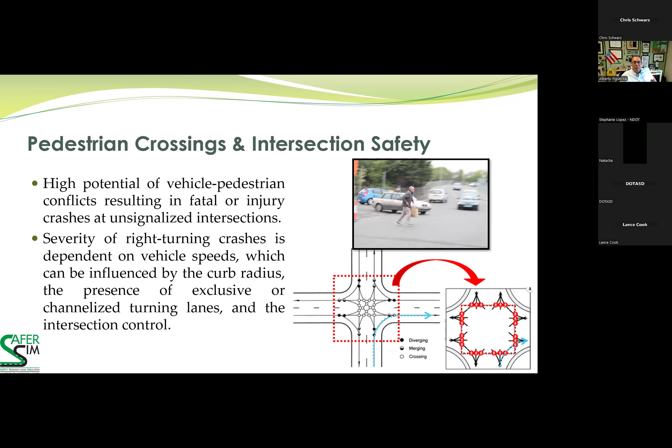Obviously, the severity of those right-turning crashes has been linked to the speed of the turning vehicle. And the speed is also influenced by the curb radius at the intersection, the presence of turning lanes, if any, and also the traffic control. One of the safety issues with a right-turning vehicle is the focus of the driver. They might be focusing on their left side, looking for conflicting traffic coming into the intersection, and might be overlooking pedestrians on their right side. And they realize that once they are already at speed trying to complete their turn. So that's one of the issues we wanted to look at with virtual reality.

We have used virtual reality as a pedestrian simulator in previous studies. We completed 2 studies in the Safer Sim group. And other colleagues at the Safer Sim Consortium have worked with virtual reality and shown the benefits of using it to study pedestrian behavior in a safe and controlled environment. Obviously, the real life is outside on the street, but you have many confounding factors, and collecting data in real conditions is not cheap, and sometimes it's very complex, depending on the amount of technology you have available.

So the benefit of virtual reality is having that interactive simulation. There are opportunities for interaction between the user and the scene, and the sensory immersion allows the technology to recreate in some way real world experiences. Like I said, researchers at the University of Iowa and other members of the Safer Sim team, for example, Dr. Kearney, Dr. Plumert, have used virtual reality, and they have shown the application of virtual reality technology for studying the human brain and the reactions.

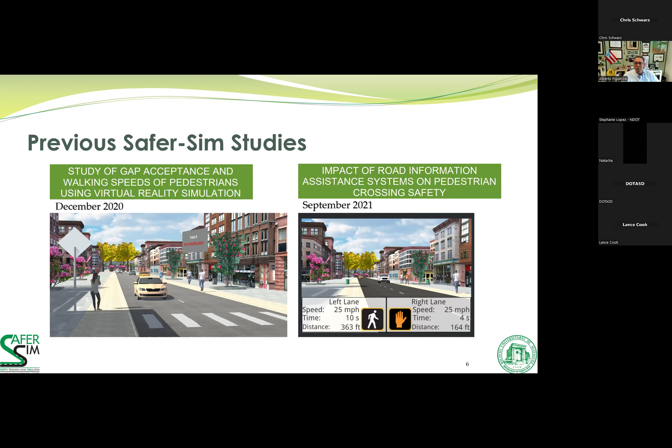So very, very interesting. And those two webinars, we already completed those. The reports are on the Safer-Sim website. So I invite you to take a look at them if this topic is of interest to you.

In this study, the objective was to simulate right turning situations. So we now move from the straight segment to an intersection. And we use unsignalized intersection for this topic. We wanted to see the behavior of the road user at those type of movement, right turning movement at the intersection. I can say we, at the beginning, were very aggressive in the proposal, probably looking hindsight. These are really two projects into one. We wanted to see the two perspectives on the situation, first the drivers and then the pedestrians. So the concept was to analyze right turning behavior from the two perspectives, drivers and pedestrians.

In the case of the driving simulation using virtual reality, this was our first attempt. So obviously, I want to acknowledge that we had a lot of growing pains to create the virtual reality for the driving simulation. We didn't have that experience before, so we started basically from scratch, trying to recreate the cockpit driving simulator that we already have with the screens and everything, and we wanted to recreate that on the virtual reality technology. And it took us a lot of time, more than we expected at the beginning.

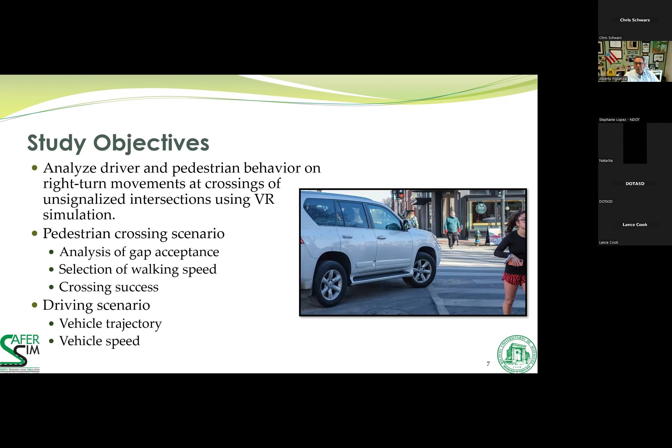And we required assistance. I have to thank Dr. Kelvin Santiago from University of Wisconsin, who gave us a lot of help, technical assistance, how to adapt our current driving simulator to the virtual reality environment. So that was a lot of help, but like I said, it took us more time than we expected at the beginning. So we had to make some changes to the methodology we proposed at the beginning. The methodology included 12 steps. 8 of those, we had to repeat them for the driver scenarios and then for the pedestrian scenarios.

At the beginning of the process, we wanted to have a sequential process, and we wanted to have the driving simulation first, so we can measure behavior of drivers at the right turning movement, and then take that information to program the avatar vehicles on the pedestrian simulator. Like I said, the time it took us to complete the driving simulator was too much, and because we had already experience with the pedestrian simulator, we had the pedestrian simulator rather quickly after we created the city. So instead of having a sequential process, we decided to split them apart and have them as parallel paths with the pedestrian and then with the driver. So that was the sequence we followed.

We had to create a city, a virtual city for the projects to be able to run the test trials, and then we created the scenario. So let me tell you that the city was based on a 6x6 block structure.

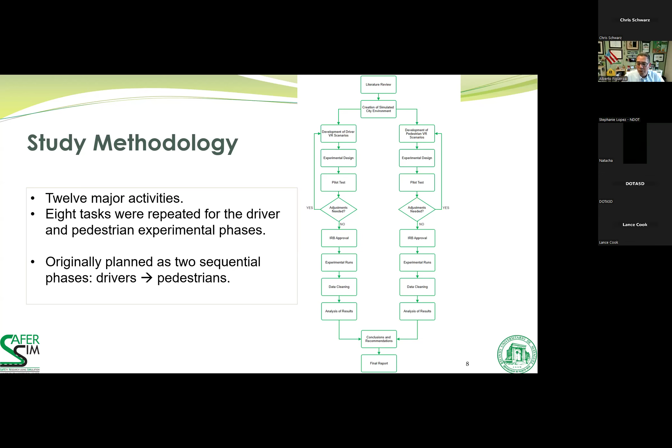Like I said, the pedestrian experiment we did rather quickly because we had the experience from the previous projects. For the driver simulator, we had more time to create that. We had a sample of 24 subjects for the pedestrian simulation and 24 subjects for the driving simulation. And I'm going to show you some of the details for the development of the city and the scenarios that we conducted at the lab.

You see a top view of the city. We created a 6x6 block, except for 2. All the blocks were similar in size. It had a rectangular shape, 3 units vertical, 1 unit horizontal. You see, it's a small block, small city, a walkable city, you can say.

And we have 2 types of streets. We have the main street going north-south. Those were 4 lanes, no median, no control, so basically free flow. And then the side streets, 2-lane side streets going east to west, and those had stop control at the intersection. So that was the setting we used for the city.

As you can see on the right side, we put buildings wide. The sidewalks were about 20 feet. We wanted to give a good depth perception to the driver so they didn't feel confined in the virtual scenario. And the lanes were standard 12 feet. And the corners, the standard size of the corners is 15 feet.

We spent a lot of time trying to have a video projection on the virtual reality goggles that didn't produce that vertigo in people. So that was the main issue. That was the thing that took us a lot of time for the driving simulator.

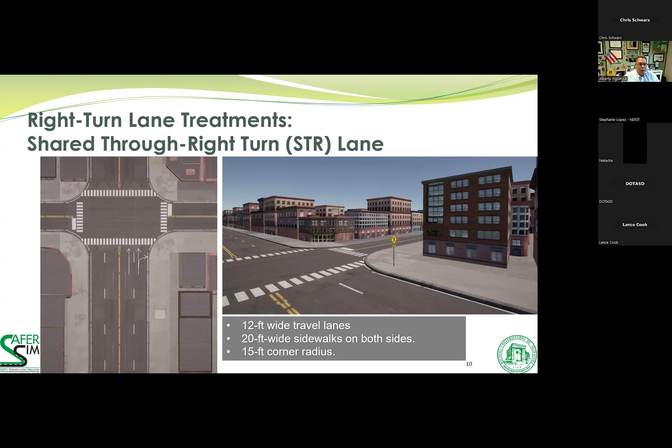Once we created the city, we wanted to add different treatments for the right turning. So we had 3 treatments. The basic lane was a shared through-right turn lane. Like I said at the beginning, all the corners had 15 feet in radius. So it was like a medium-sized corner. It wasn't very small. It wasn't very big. And as you can see, the intersection is a basic intersection.

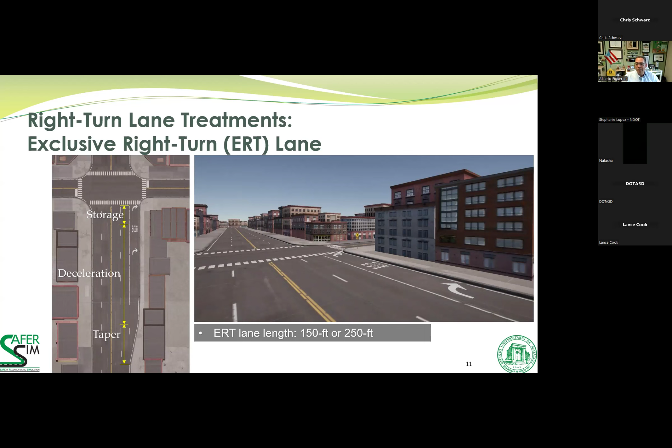The second treatment was to add an exclusive turning lane on the right for the right turning movement. We used AASHTO Green Book typical values. We added a taper, deceleration, storage, and we had 2 options. We included 150 and 250 lane lengths to see if the size of the lane had any effect on the behavior. So that was the second treatment.

That's the ERT lane. And the third one was a channelized right turn lane. In this case, we had to increase the radius of the corner so we can promote higher speeds of vehicles in the driving simulation. And we decided to go with 2 options, 30 feet and 60 feet for the turning radius.

So those were the 3 treatments for the right turn movements that we wanted to test for the driving simulation to see how drivers react to those geometrics at the intersection. And because of the issue with the quality of the images, we had to change our approach and went to the pedestrian simulation first.

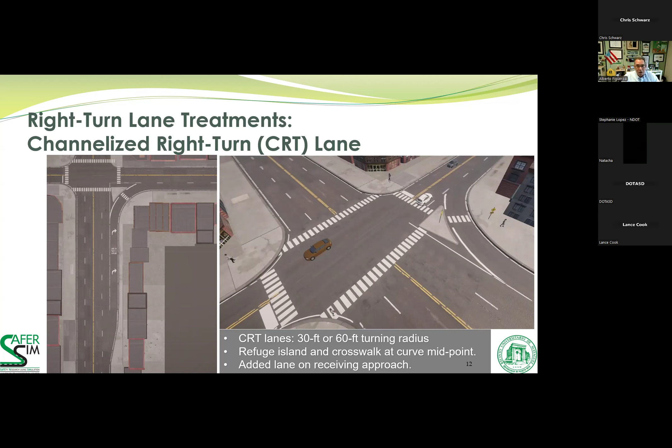And for the pedestrians, we decided to only test them on this scenario, on the channelized right turn lane. Why? Because during the pilot testing with the other 2 treatments, obviously the drivers had to reduce a lot of the speed to make the turns. Basically, it was a narrow side street. In the virtual reality, with the 2 lanes, a lot of people basically had to stop to get to the turning lane. So we decided that the conflict with the pedestrian was not really that high, and we decided to keep the channelized right turn as the test track for pedestrians.

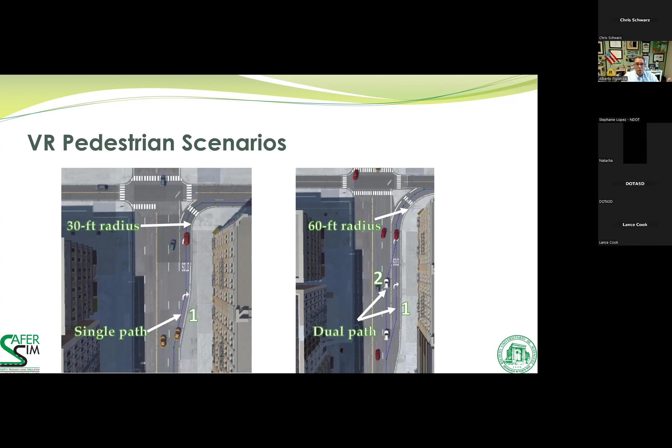And for the path factor, these are the 2 factors we use. A single path, assuming people take the taper, enter the turning lane, and make the operation right, as you can see on the screen. And then the dual path is that we have 2 paths that vehicles enter the right turn lane. One, the following is the basic, and the other is a more aggressive driver that enters the turning lane at the middle, and those two paths were randomly assigned to vehicles on the simulation.

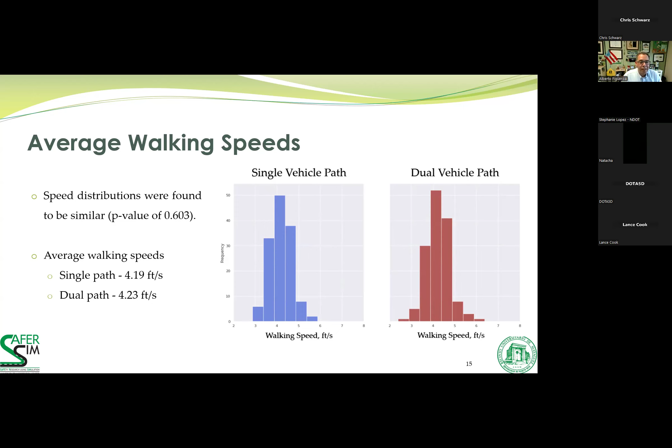So some of the results, and I have about 5 minutes or so to give some time for questions, is that average walking speeds based on the path of the vehicles surprisingly didn't have any effect on the pedestrians. The pedestrians were watching traffic coming into the turning lane. It didn't matter basically if it was the single path or the dual path. The speed distributions were similar statistically, as you can see from the mean value, basically the same. So there was no effect for the path that the vehicles follow to enter the lane.

But when we saw the combination of the lane length and the radius of the turning corner, statistically, if you go by 95%, you can say that they are similar, but they are marginally similar. You see it's 0.08. So if some people on safety analysis go to a 90 percent confidence level, then you can say that there is some effect of the radius of the corner on the walking speed that the pedestrians use to cross the turning roadway. Mathematically, you can see 4.27 for the larger radius, 4.15 for the smaller radius. You can see it's very close, but there was a marginal difference between those two factors. The lane length didn't show a big difference, as you can see from the distributions.

On the gap taken, which gap the pedestrian accepted in the vehicle stream to decide to cross. Remember that the vehicle gaps had a range from 3 to 8 seconds, and those were assigned randomly in the traffic generation in the simulations. We also found that the gap that people accepted didn't change due to the radius or the other factors of the geometrics. You can see 6.7, 6.8 seconds for either radius.

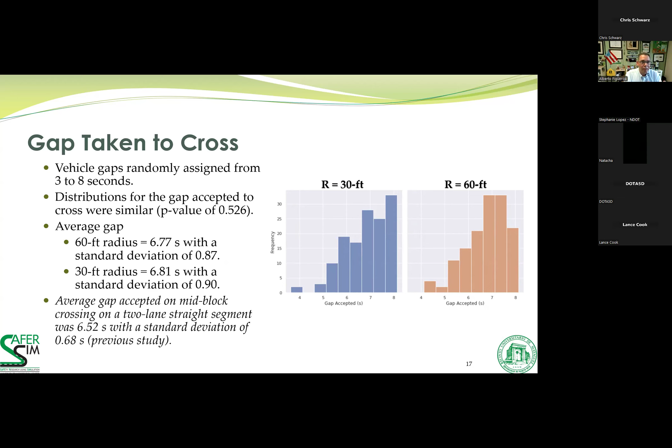And to give you a perspective, I didn't have much time to do all the comparisons, but if you go to the project for the mid-block crossing, the gap accepted is very close, 6.5 seconds, with a similar standard deviation. So that might be telling us that people are using a pattern of behavior on the virtual reality simulator, very similar, no matter the setting that they were in.

So that's very interesting. Crossing success, how many times the person was able to cross safely. It was a 96% success rate. We had 10 collisions out of 288 observations. And out of the 24 subjects, 7 were struck or hit by a turning vehicle. So they were obviously in a crash. Interestingly, 2 persons had more than one crash.

So that means that they really didn't understand the actual behavior, or the good safe behavior, how to cross the road. From the 12 times they had to do it, this subject, a 22-year-old female, was hit 3 times. And in our simulation, they knew when they got hit because we put a display that started flashing a message, you were hit. So the pedestrian knew when the vehicle hit them, even though they might not see it because they were focusing their visual display on different settings.

So they knew once they crossed and they got hit. So they will understand they will be assessed and try to do it well. See if they are just going by the project. So this is the subjects on the pedestrian side. On the driver side, like I said, we had some issues. We created this from scratch basically, and we decided to give it a trial.

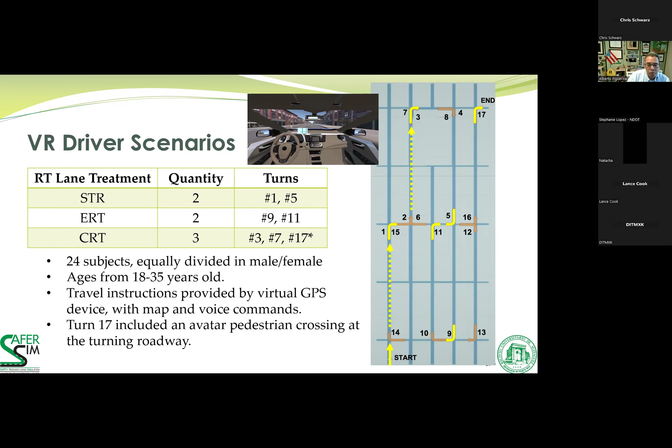And to understand where they have to turn, we added GPS commands, visual and voice commands on where to turn, where to follow, where to go through, and so on. So people obviously understood quickly the trip they had to make. And I know I'm running out of time. We managed to recreate the results from the cockpit driving simulator, and we had access to the speed profile.

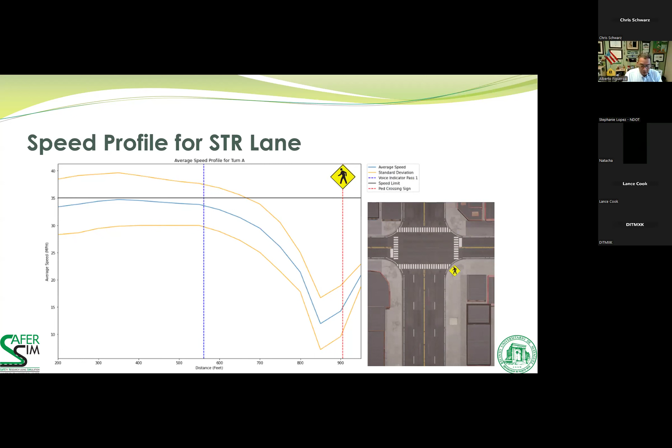I will show you very quickly the behavior of people making the right turn at the shared right turn. As you can see, the vertical blue line is the last voice command telling them go to the right. People started slowing down once they heard the last confirming message that this is the intersection they have to cross. And you can see that on average, they went as low as 10 miles per hour to do the turn on the 15-foot radius.

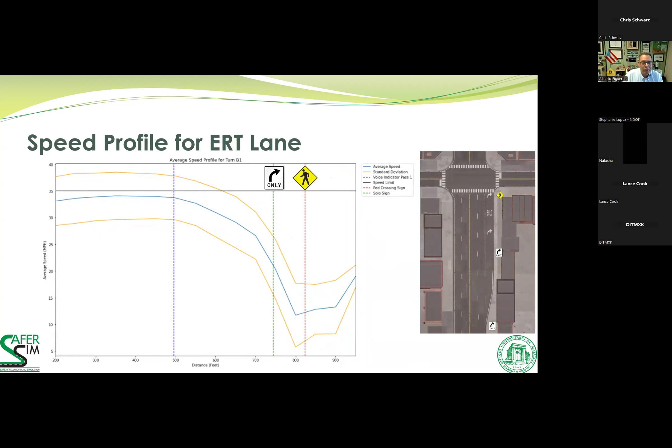When you go to the exclusive lane, behavior is basically the same. Obviously, there is a change in the profile due to the entrance to the exclusive lane. So the deceleration went higher at that location once they entered the turn-only lane. But as you can see, the turning was basically at the same speed, about 10 miles per hour.

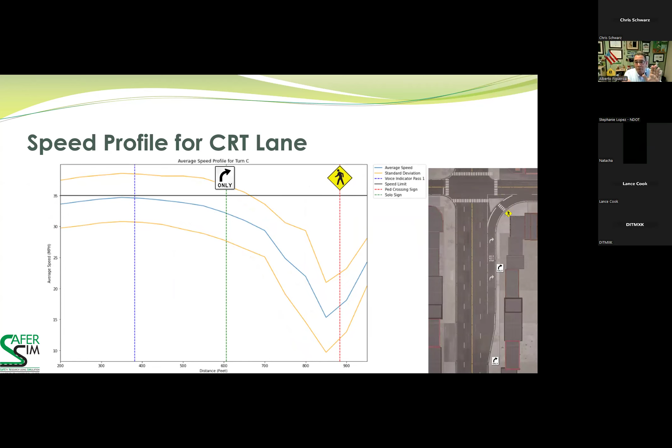When they got into the right turning lane, the channelized, now you can start seeing higher speeds, as expected. It went up maybe 3-4 miles per hour on average, but the spread also increased on the channelized. So more people understood that the channelized geometry allowed them to go faster. And on the other two treatments, the spread was smaller. So obviously, this type of geometry allows more people to feel comfortable going faster.

And to end the presentation with this last result, we also had access to the trajectories across the entire city. And we focused on this location. This is one of the right turns with the channelized lane. And we used this one as a confirmation that our assumption of the dual path actually makes sense, that people actually do the dual path.

Some of them enter the lane at the beginning, and you have other drivers that, even from the left-hand side, went and made the cross to enter the right turn, even though they had the second voice command telling them this is the confirmation.

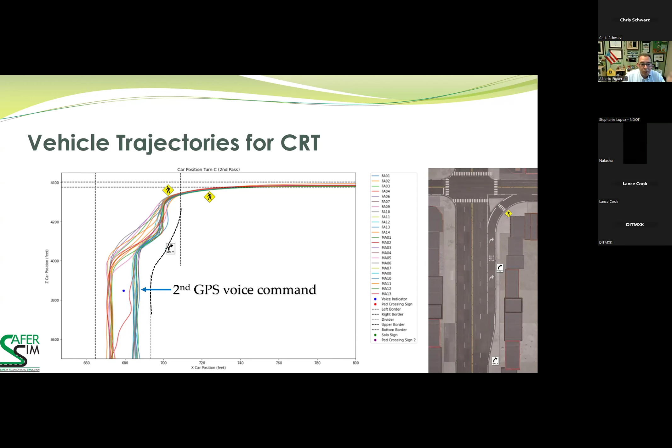Okay, you have to cross because they have a first voice command already planning the right turn. So to end, some of the comments we can make from this study is that average walking speed was slightly affected by the radius of the right turn at the intersection. So they walk faster at those locations where vehicles were faster.

So that was consistent. But overall, the other behavior, speeds, gaps taken, and the intersection crossings were very similar to the results we found from the previous experiments for the midblock. When you see the numbers, the behavior is very similar.

When we get into the driving, like I said, older subjects have issues with the technology. They have vertigo, nausea. So we have to improve our hardware, maybe the video card, to have more processing power, so we can reduce that latency that people obviously feel on the headset. Vehicle speeds were higher for the channelized right turn.

That's an obvious result. And the virtual reality driving simulator confirmed that dual path of how people enter the turning right lane at the intersection. So in a nutshell, that was the project that we completed on the use of virtual reality for pedestrian and driving behavior related to right turning movements at unsignalized intersections.